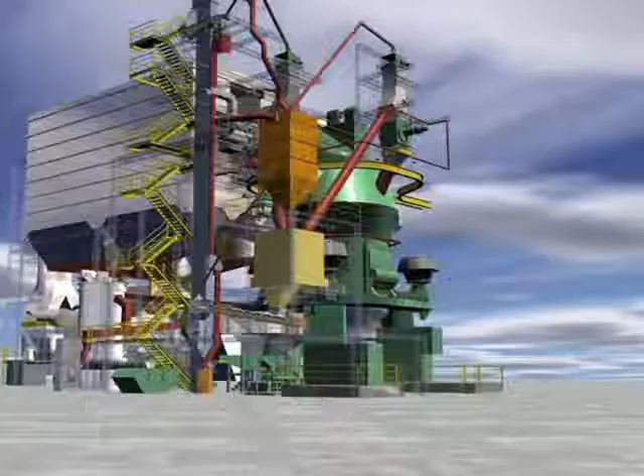Here you see, in the form of a 3D project presentation, a complete cement grinding plant equipped with an LM 56.3 plus 3C for 260 tons per hour OPC. This modern CAD method is the current state-of-the-art at Loesche for the planning and design of entire plants.

What we are now going to show you is a flow sheet of a cement and blast furnace slag grinding plant using an LMCS Loesche mill. The number of bunkers reveals immediately that both single components such as cement clinker and blast furnace slag can be processed, as well as mixtures of these in combination with aggregates.

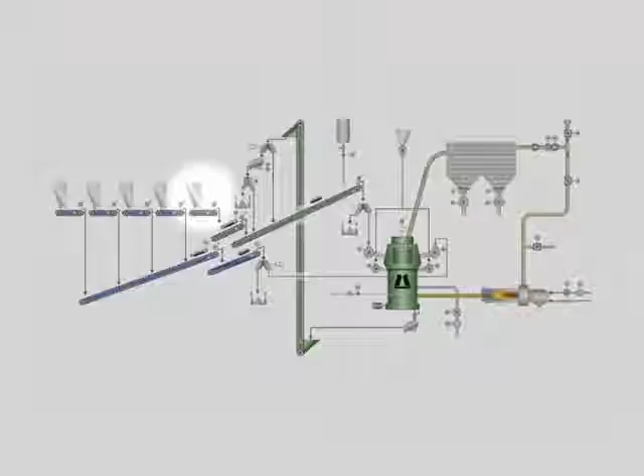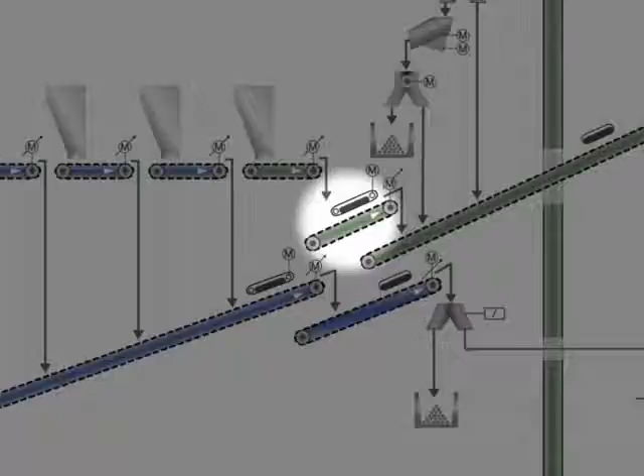Dry cement clinker is drawn from this bunker by a conveyor-type weighing machine. On the subsequent conveyor belt, foreign ferrous matter is separated by a transverse magnetic separator arranged above the belt. Non-magnetic metals are removed by a metal detector.

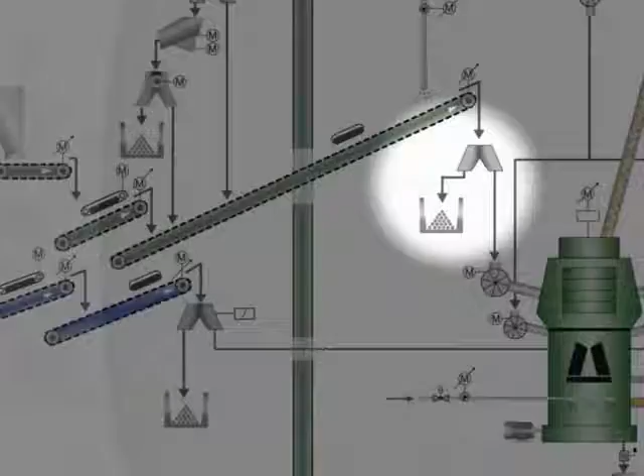These non-magnetic metals are disposed of by deflecting material from the belt. The material to be ground, now free from foreign matter, continues along a further conveyor and goes through the rotary valve and arrives in the Loesche mill. Moist material to be ground is treated in a similar manner.

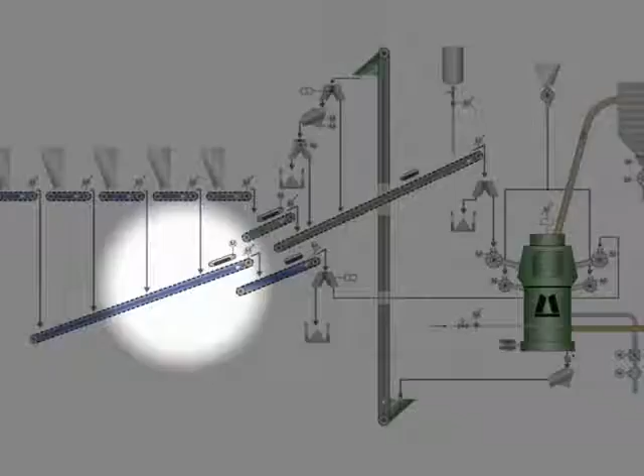Extremely fine and dry aggregates, in particular fly ash, are fed from a separate bunker into the mill through separate conveyor lines. Grinding aid stabilizes the grinding bed and is used at the request of the customer.

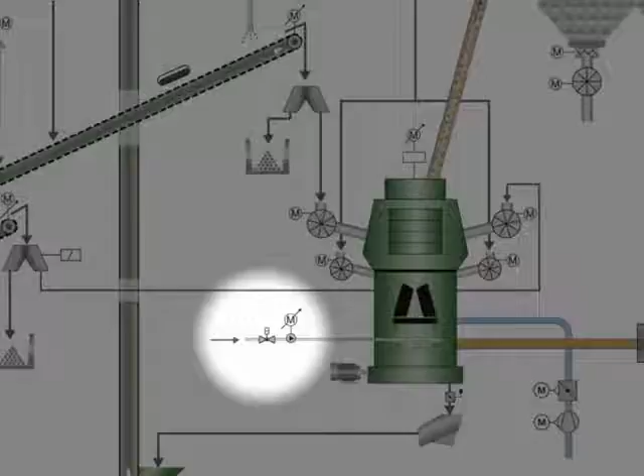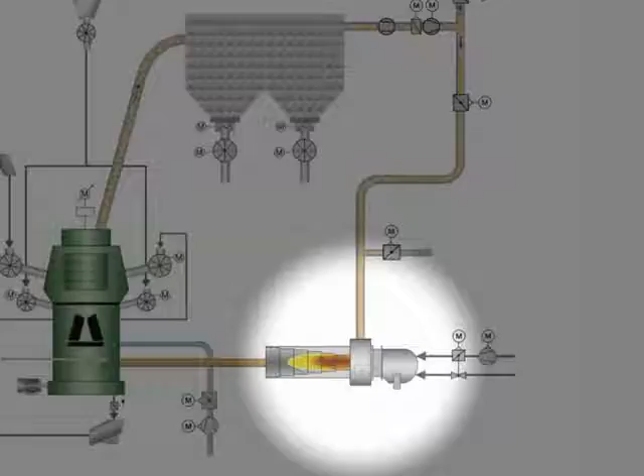The water injection system is intended to condition both the grinding bed and, if required, the hot gas flow. The necessary process gas for the mill is produced by a hot gas generator. The flow of hot gas dries the ground material and conveys it to the classifier.

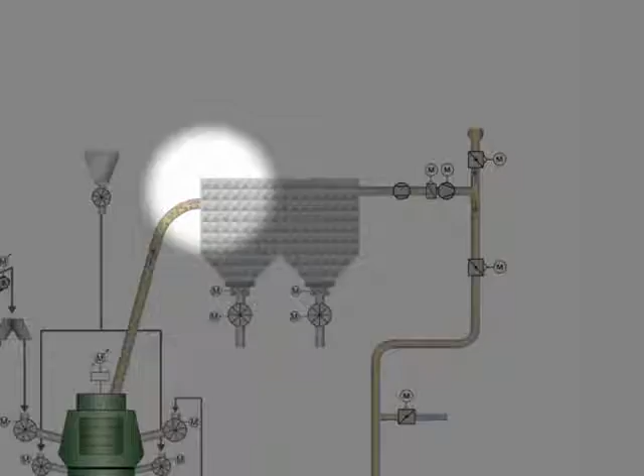The mixture of gas and pulverized material leaves the classifier and is separated downstream in the filter. The clean gas is discharged through the chimney. For energy-saving reasons, part of the process gas flow is recirculated to the mill via the hot gas generator. The fan conveys this gas through the entire plant.

Any coarse material rejected by the mill is recirculated by means of a bucket elevator to the long conveyor belt of the reject system.

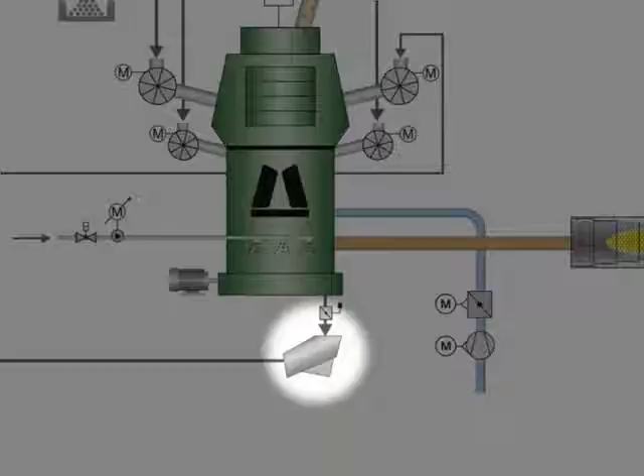The principal element of the above described grinding plant is certainly the Loesche mill with its classifier. Here are the main components.

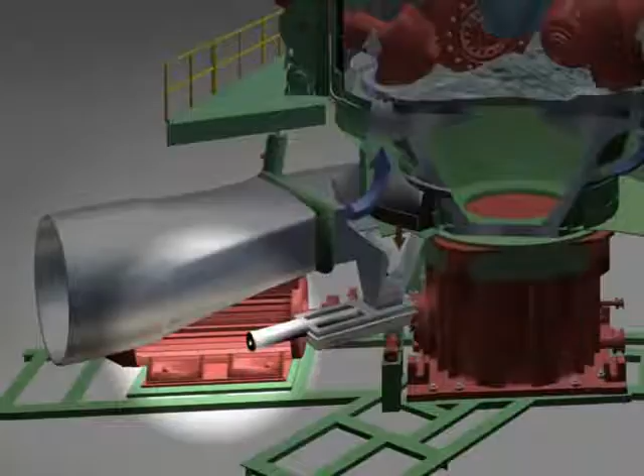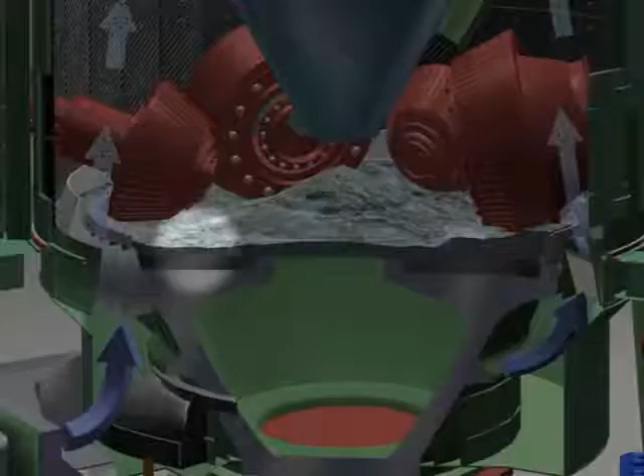An electric motor serves as a drive for the mill gearbox via a coupling. The grinding table is supported and driven by the gearbox.

The material to be ground flows over wear-resistant grinding plates that are installed in the upper surface of the grinding table. The grinding bed is crushed as it passes beneath the stationary rollers.

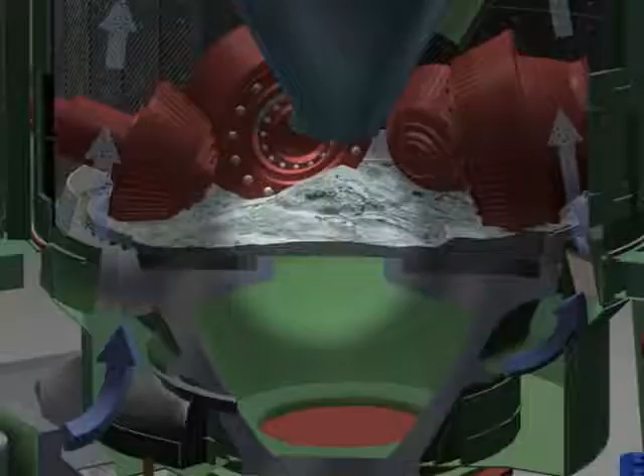Cement clinkers and blast furnace slag must be crushed to grain sizes of between 2 and 50 microns. These ultra-fine products, in the form of dust clouds in a highly aerated condition, can only be kept under control by taking special precautions.

The grinding bed is de-aerated and compressed by small preparation rollers. The actual grinding is performed by large grinding rollers under the application of high pressure.

All rollers, mutually independent of each other, are precisely guided in rocker arms and are supported by the structure of the mill.

The grinding table sits in a gas ring duct that is supplied with hot process gas through the gas ducts. The hot gas is directed into the grinding chamber through a louvering.

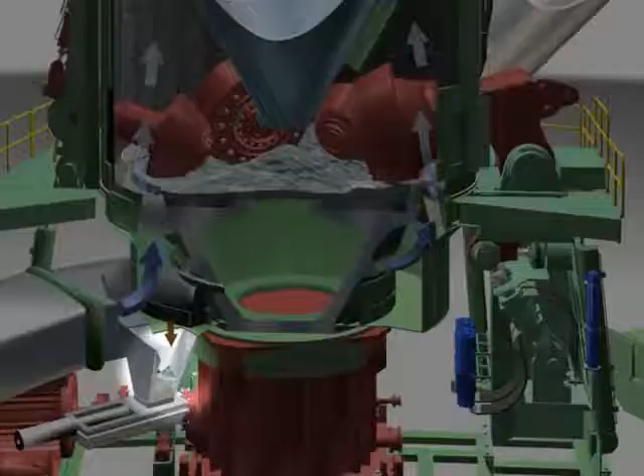The rejects drop through the louvering into the ring duct and are removed by the rotating scrapers. The ground material is dried in the hot gas stream and is conveyed to the classifier.

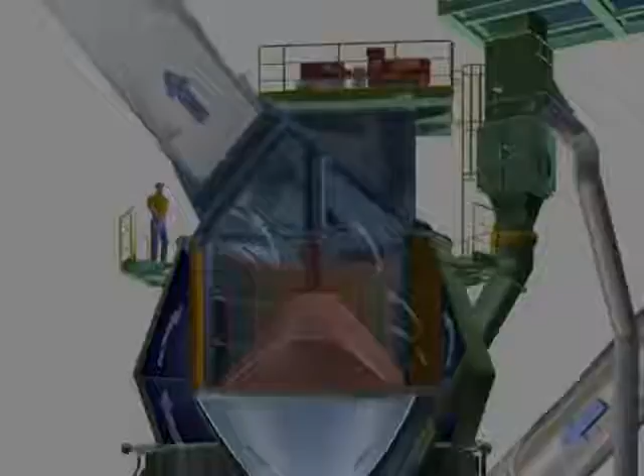The finished material passes the classifier and the mixture of gas and pulverized material flows through the ducting to the filter.

Oversized material is rejected by the classifier. It drops through the grit return cone back onto the grinding bed, where it mixes with the feed that is supplied to the mill through the rotary valve and the feed chute.

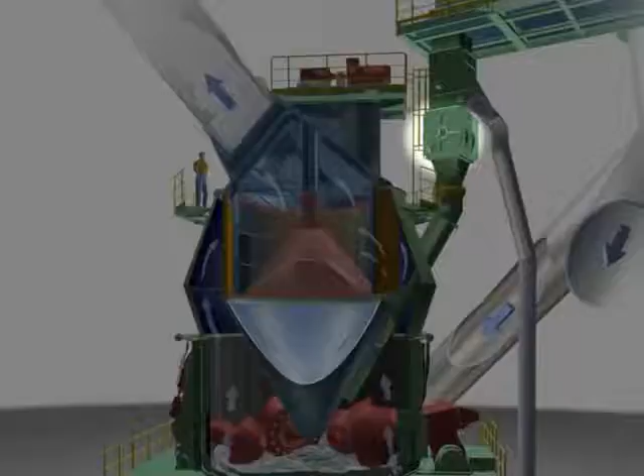Loesche mills are conceived to be service-friendly. The gearbox and rollers can be installed and removed without dismantling the mill.

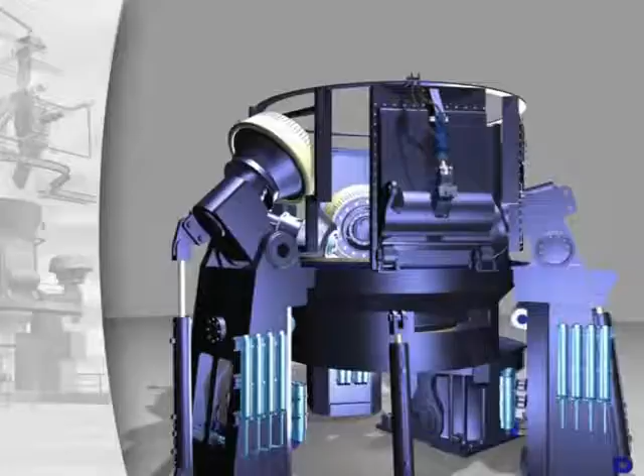The grinding plates, with swing-out rollers, are also readily accessible for quick exchange.

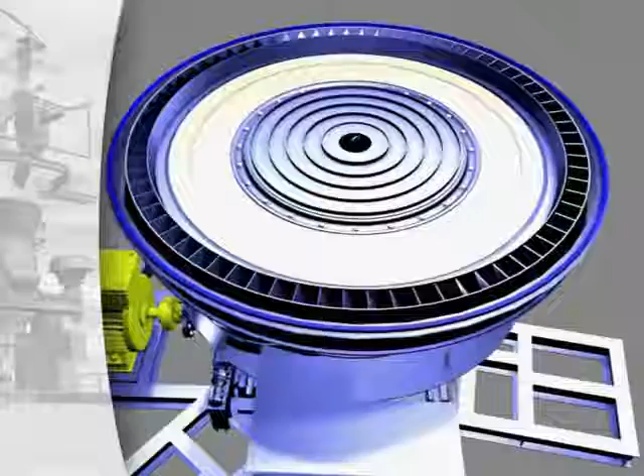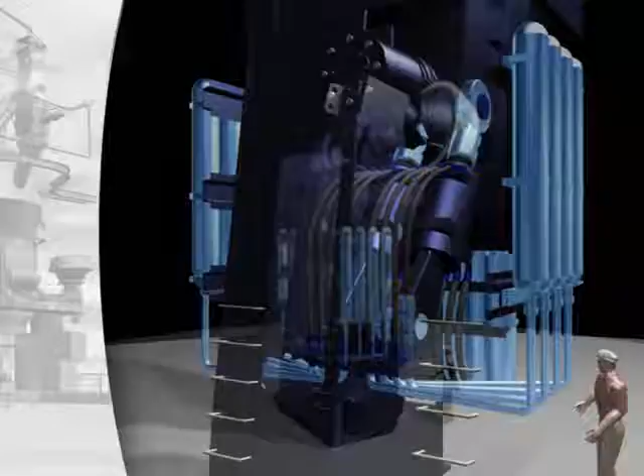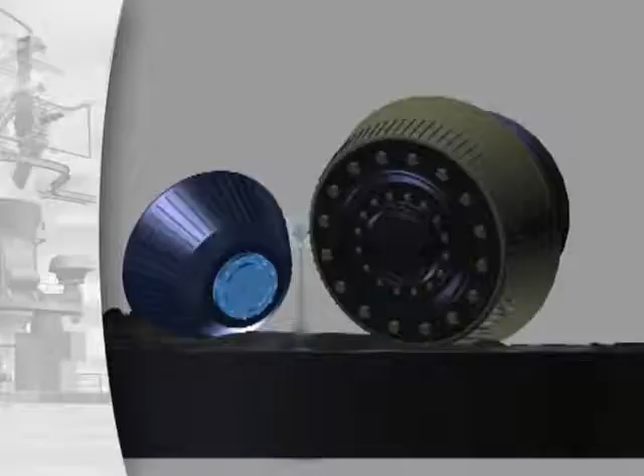The components of the hydro-pneumatic spring system for the rollers are installed in a pedestal outside the grinding space, where they are also freely accessible during grinding operations. Here you see the interaction of the preparation roller and grinding roller, and also the water injection between the rollers.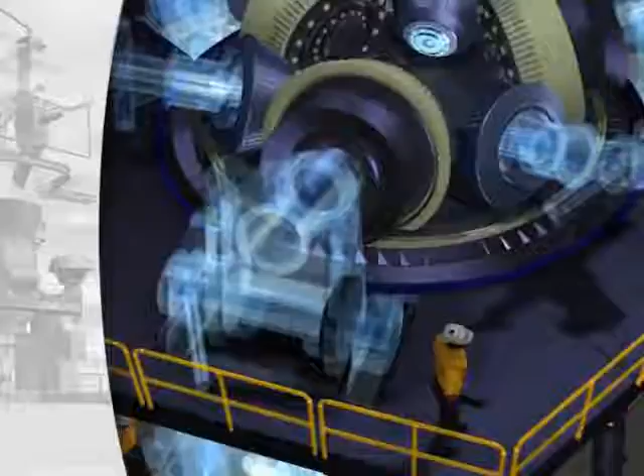These schematic flow lines mark the route of the hot gas from the gas duct through the louvre ring into the grinding chamber.

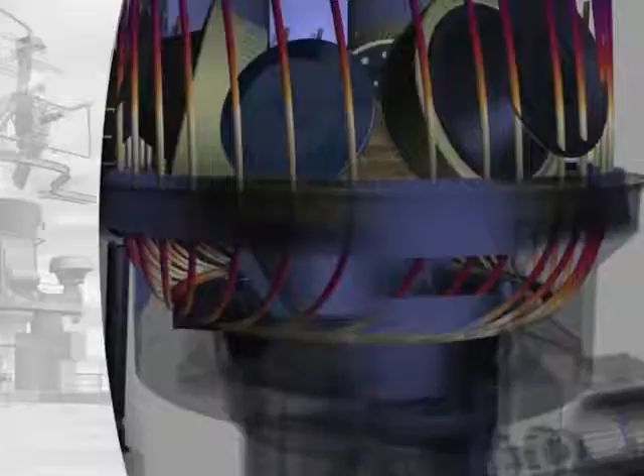A classifier, a type LSKS dynamic classifier, is installed on top of the mill. A static guide vane ring surrounds the caged rotor inside.

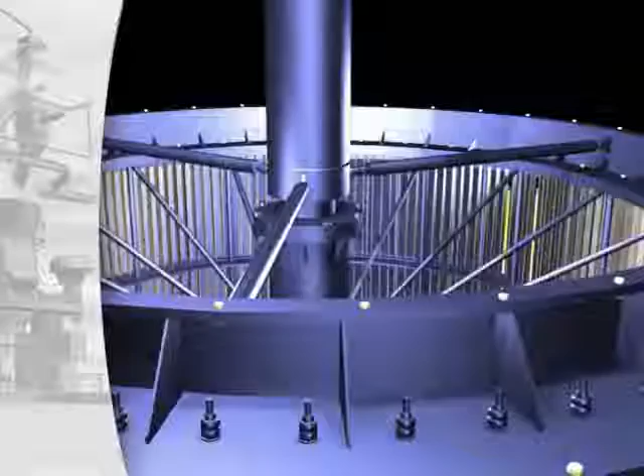The rotor is driven by a motor and gearbox unit.

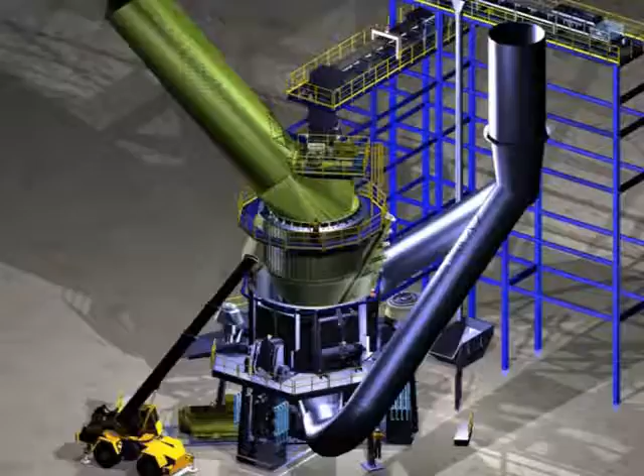The modular structure of the Loesche mill permits separate servicing of each single roller. In the swung-out position, grinding components or rollers can be quickly exchanged.

And this is how the particle flow develops in the grinding chamber and inside the classifier.

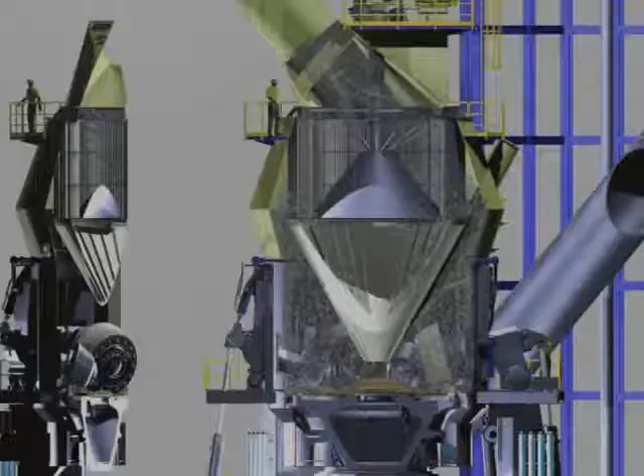The Loesche firing system was developed by Loesche in the mid-60s. It consists of a firebox made of high-temperature steel equipped with a small muffle. The process gas passes through the spiral casing into the firebox where it is heated up.

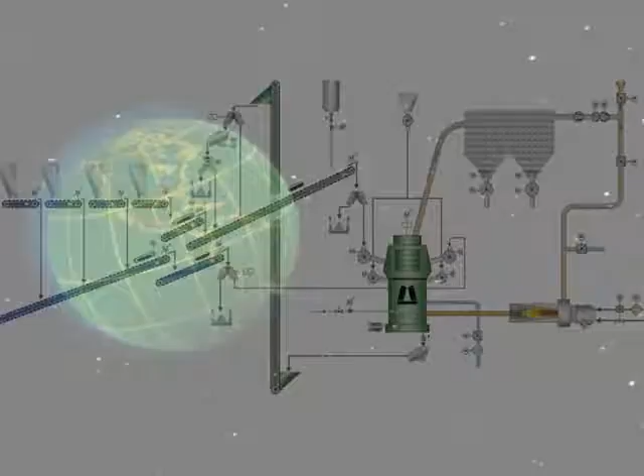The technology of cement clinker and blast furnace slag grinding in roller grinding mills has been introduced by Loesche. It saves both energy and material resources and is environmentally friendly.